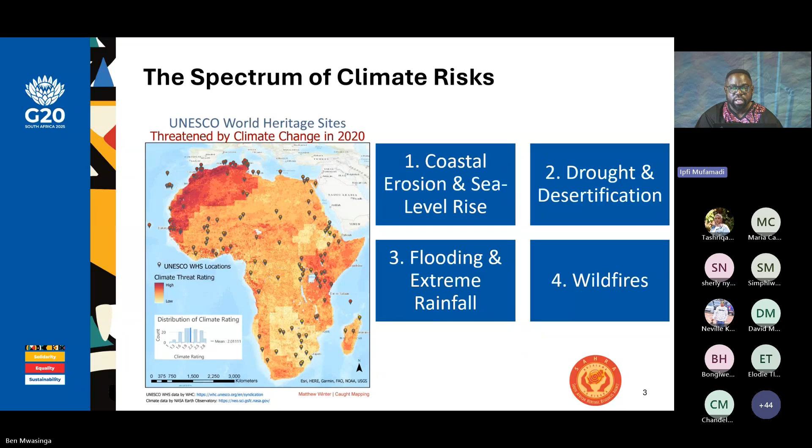The image on your left shows the mud brick buildings of the Djenne cultural landscape in Mali. This is also a UNESCO World Heritage Site. And through drought and desertification, there is further erosion of this cultural heritage site.

Another impact that it has in terms of the intangible cultural heritage is that due to the dryness of the soil, the populations living within this region are unable to replace or restore these structures, which is an annual practice. Again, we can see how something as simple as a drought or even drier conditions than usual can have a very destabilizing effect on the population, especially in Mali, where the site is located.

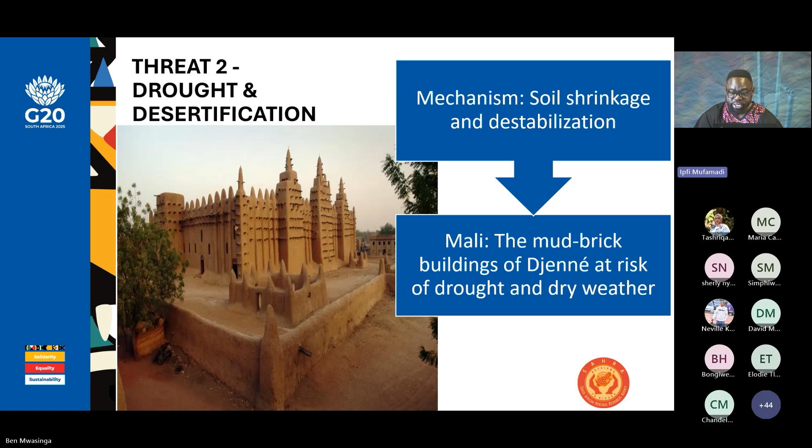And then this brings us closer to home. We had the devastating floods in 2022 in KwaZulu-Natal. There was a significant loss of human life. These events of flash floods and extreme weather conditions have been further exacerbated over the years due to changing climate.

So therefore, just as you can imagine, within South Africa, which has a massive coastline, and also a lot of shipwrecks and underwater cultural heritage, there is a severe risk to those heritage resources. One of the cases which will be explored today is the Tatham Art Gallery, which is in KZN.

And then we have wildfires, which have been a growing occurrence again within South Africa. A lot of us are aware of the fire that devastated the Jagger Reading Room at the University of Cape Town. As it has been established now, the very dry conditions, which were not normal, and the rising high temperatures within Cape Town played a significant role in the devastation that happened at the Jagger Reading Room. There was a significant loss of archives within this reading room.

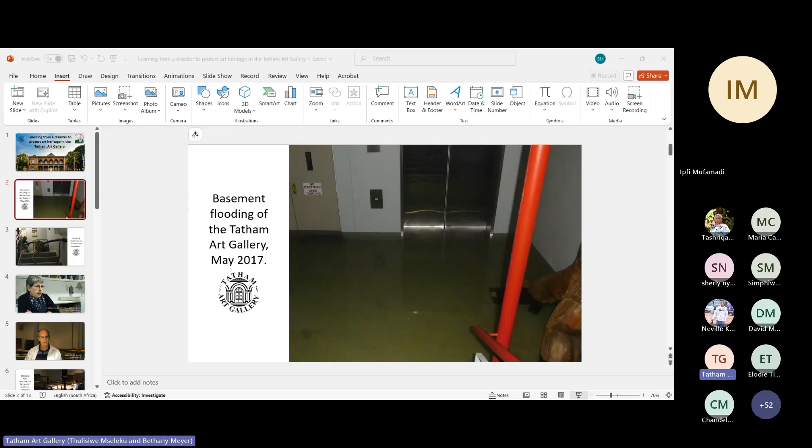As tragic as this incident was, it did highlight the need for the gallery to upgrade its current systems and create backups in case of power outages. This included adding new equipment and upgrading current infrastructure.

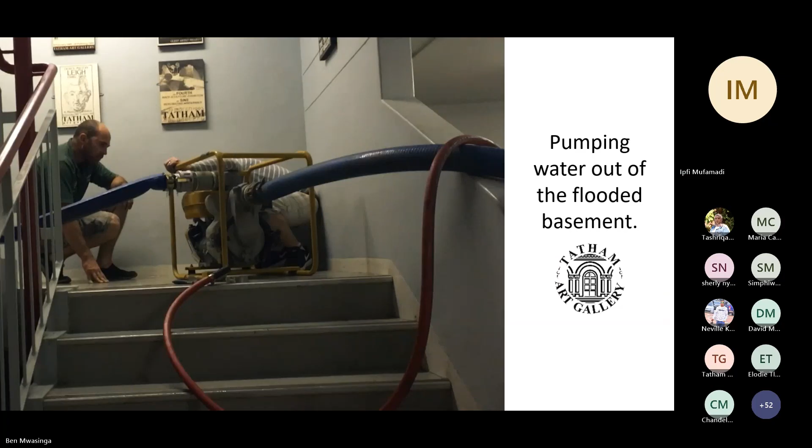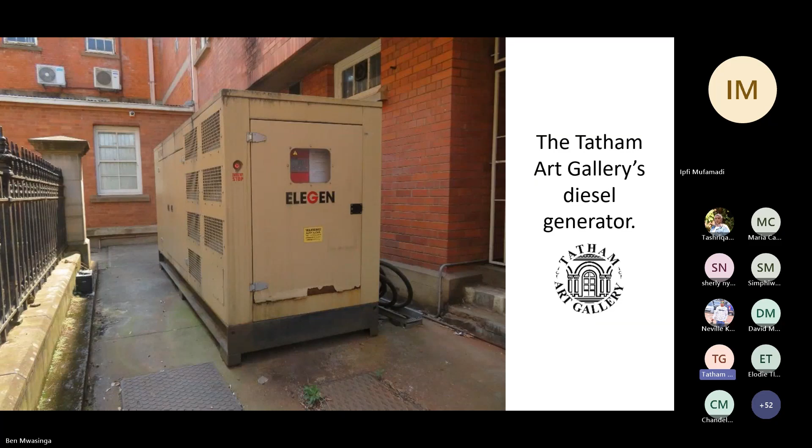The gallery started by commissioning a diesel generator as a power backup. The generator services the whole gallery as well as the water pump systems. This generator can potentially power the gallery for up to 24 hours. And additional preventative measures were the purchase of an independent petrol pump. Next slide, please. In case the backup generator either failed or the power went out for longer than 24 hours.

The gallery has also worked to include their aircon and pump service providers, Action Air, and their generator service provider, Doozy Electrical, in their action plans in case another flooding event occurs. This lets everyone know the correct responses and procedures during a similar event. This new equipment was an important part of the gallery's preventative plan. However, the storage area also needed improvement. Next slide, please.

To do this, the gallery expanded its basement storage area so that there is now an additional 80 meters of storage racks. And they converted a basement workroom into extra artwork storage and added a new fire suppression system. Next slide, please.

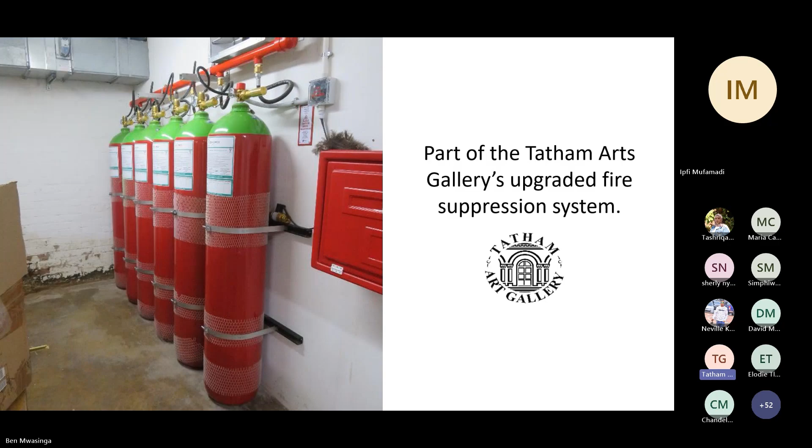The gallery storage policy has also been updated so that all the storage racks must be raised to 0.5 meters off floor level. Next slide, please. Next slide, please.

All the measures listed above were specifically implemented because of the 2017 flood. However, the gallery realizes it needs to continue to improve its infrastructure to preserve its collection, especially as climate change makes conditions more unpredictable. Climate change has disrupted water availability a lot, especially in the last couple of years. Water is integral to keeping the gallery's air conditioning systems running to keep the gallery at a consistent temperature, which helps in preserving the artworks.

To prevent water availability from disrupting the gallery's storage integrity, the gallery integrated water from the underground stream into the gallery's air conditioning system. Next slide, please.

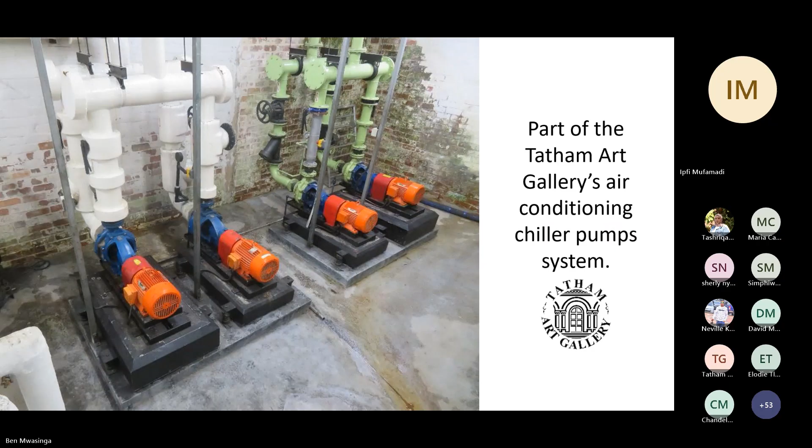However, the gallery does not only struggle with water shortages and how that affects preserving artistic heritage, but also, like the flood in 2017, excess water is another big struggle. The Tatham Art Gallery is a Victorian building that was completed in 1871 and is over 150 years old. Unfortunately, due to the complexity of its roof design, gallery staff have been fighting a losing battle with leaks for the last 20 years or so. This problem has been exacerbated in the last couple of years as heavy rain and windstorms have become more frequent. Next slide, please.

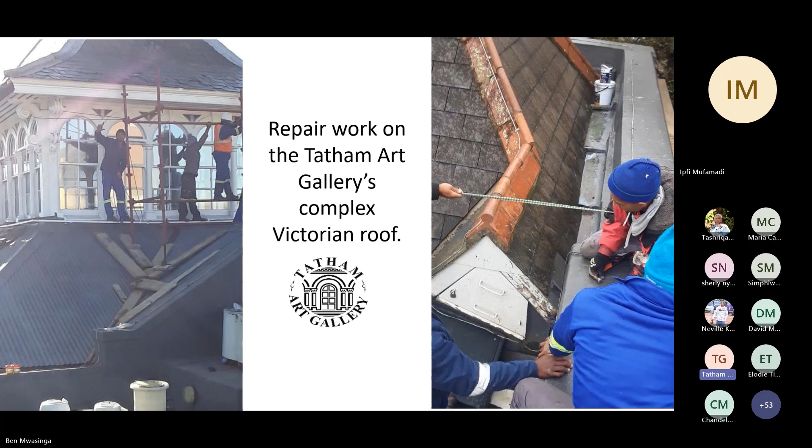The continuous leaks have affected the gallery in a number of ways. Structurally, the roof and other structural components need regular repairs in order to keep the gallery functional. Next slide, please. The water damage also affects the gallery's ability to host exhibitions. There are several display walls where the artworks have had to be permanently removed due to wall leaks. It has also affected some of the gallery's storage areas, which has required the gallery to create makeshift storerooms. This can make retrieving artworks difficult, and that can delay exhibitions.

Although the Tatham Art Gallery is committed to fully repairing the roof, several logistical aspects make it difficult. As a heritage building, the gallery needs to consult with AMAFA, the heritage statutory body in KwaZulu-Natal, before they make any changes, which makes it hard to do more than make small repairs. The tiles which would be needed to make repairs were imported and have been discontinued, so sourcing them is difficult. The gallery would also need to find an expert on restoration and repair of both heritage and Victorian buildings. Despite these difficulties, there is ongoing work to organize the full repair and restoration of the roof. However, it will be slow due to the logistical reasons listed above.

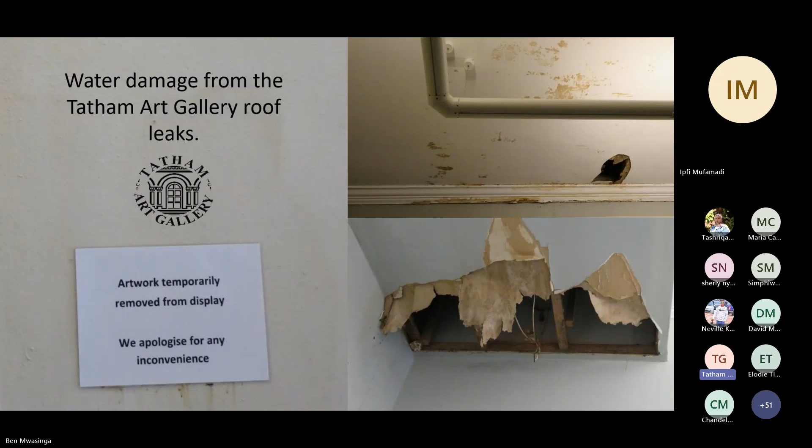Good morning, colleagues. My name is Tulisiwe Msaleko. I'm the manager at Tatham Art Gallery and Theatres. Let me just apologize that I think technology is letting me down here. My battery has just gone off and I'm trying to charge, it's not charging.

So if the building is over 60 years, it is registered as a heritage building. So you don't have to do any renovations or any alterations that you may like to do in the building without consulting them. They are constituted according to the KZN Heritage Act, and also the Cultural Institutions Act. So they are just a constitutional body that we need to follow. We need to comply with them whenever we are renovating. So in my experience, I've been at this gallery and we are having a challenge. I hope you heard my colleague trying to explain how old our building is.

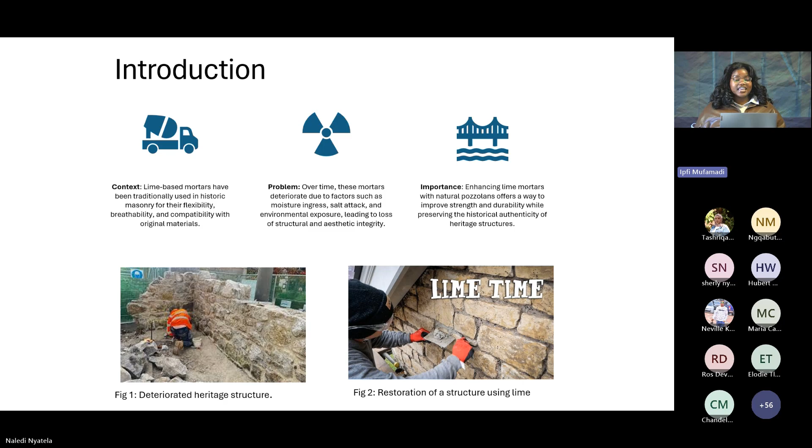What makes this exciting is that pozzolans are natural. They are widely available and low in carbon compared to cement. In fact, they can reduce the need for high energy materials, making conservation more environmentally friendly. It's a way of blending heritage wisdom with modern sustainability goals.

So the main research question driving this project is: how do pozzolans affect lime mortar properties? The aim is to identify formulations that provide better mechanical and durability performance while still aligning with the requirements of historic masonry restoration. To answer this, I've defined three main objectives: one, to investigate the effect of natural pozzolan on the workability properties of lime-based mortars; to investigate the effect of the natural pozzolan on the strength of these lime-based heritage mortars; and to investigate their effect on the durability properties of the lime-based heritage mortars.

I will be testing 3 natural pozzolans: bentonite, calcinated clay, and metakaolin. Each pozzolan will partially replace lime at 10%, 20%, and 30% by weight of the binder. These specific percentages are selected based on findings from past research, which shows that a 10% replacement often provides minor improvements with minimal changes to the mortar's traditional behavior.

And then 20% is considered a balanced point, where the strength and durability gains become more noticeable. And at 30%, it tests the upper limit of the pozzolan substitution, beyond which the mortar may start to behave like a hydraulic mix, compromising heritage compatibility. So testing across this range helps to identify the optimal performance and historical integrity.

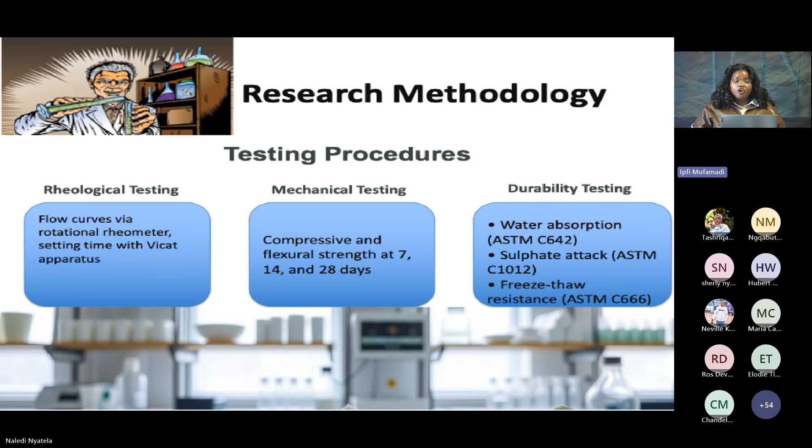And finally, durability testing, including water absorption, sulfate resistance, and freeze-thaw cycles. These tests will simulate moisture ingress, chemical attack, and thermal stress, giving us a well-rounded picture of the long-term performance of these natural pozzolans. So from these tests, I expect to identify a few practical mixes.

One, mixes that improve strength and resist moisture damage; mixes that keep the mortar breathable and flexible; and mixes that are easy to mix and that we can apply in real restoration projects. And lastly, mixes that use locally available or low-cost natural materials where possible. After I'm done, these mixes can be recommended to conservators, masons, and municipal heritage officers for trial repairs, with the aim of scaling successful recipes across similar sites.

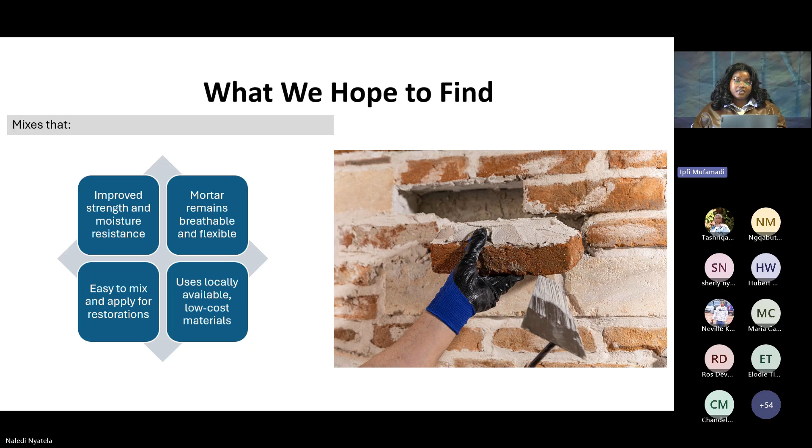So this work is not just academic, it has real local benefits, and I'm going to highlight a few. With this work, at the end of it, it can help heritage structures, because when you use these mixes, we might have stronger, longer lasting repairs, which means fewer interventions over time. That's going to save money while preserving authenticity.

It can also provide better resistance to salt and water, especially important for coastal areas and for buildings struggling with rising damp, like here in Cape Town, like Castle of Good Hope. And using natural materials that are locally available supports sustainability and keeps our suppliers involved and keeps traditional craft skills alive.

And finally, we can have clear practical guidance that empowers small heritage groups and local government to make informed decisions about their repairs.

So all of this is grounded in well-established conservation principles: compatibility, minimal intervention, and reversibility. In other words, we are not replacing traditional mortars with cement. Instead, we are fine-tuning them, making small, thoughtful additions that will strengthen performance while still respecting the original fabric of the building.

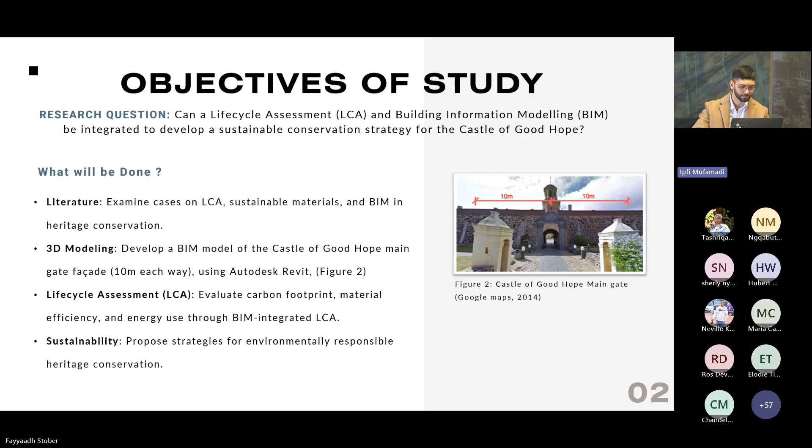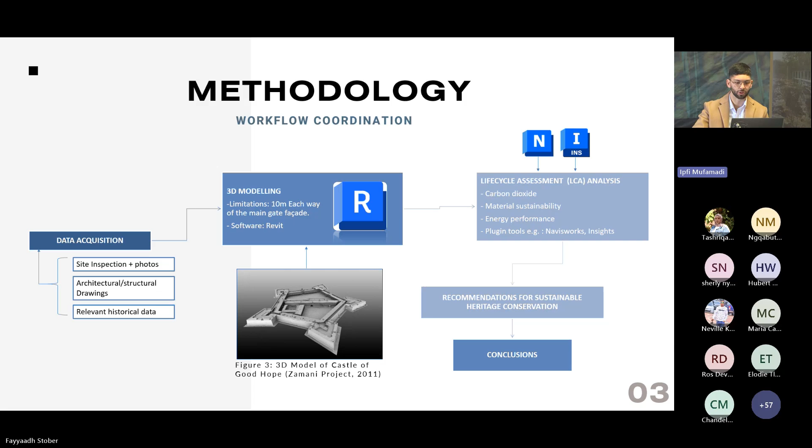Thirdly, we will move on to the life cycle assessment analysis. In conducting the life cycle assessment, we will focus on carbon dioxide emissions, material sustainability, and energy performance, utilizing Revit plugins such as Navisworks or Autodesk Insights. For the recommendations and conclusions, we will formulate recommendations for sustainable heritage conservation based on the life cycle assessment findings.

This step is crucial for green heritage as it ensures that any intervention is based on accurate real-world data rather than just assumptions. For the 3D modeling, we developed a detailed BIM model of the main gate facade using Revit. This digital representation allows us to apply material properties and simulate conservation strategies without physically altering the structure, thereby reducing waste and unnecessary interventions.

A bit of background, according to Robertson 1980, the walls were mainly constructed of dressed Malmesbury slate bonded with lime mortar and are about 5 meters wide at ground level and about 8 meters high. The red brick capping was about 2 meters high and was added in 1830 by the British garrison.

The third step of the current findings will be our sample analysis. We tested the life cycle assessment tool using a sample dataset to evaluate its efficiency and understand how outputs will be presented. While these results are preliminary, they provide a framework for assessing the carbon footprint, material sustainability, and energy performance of the Castle de Goede Hoop.

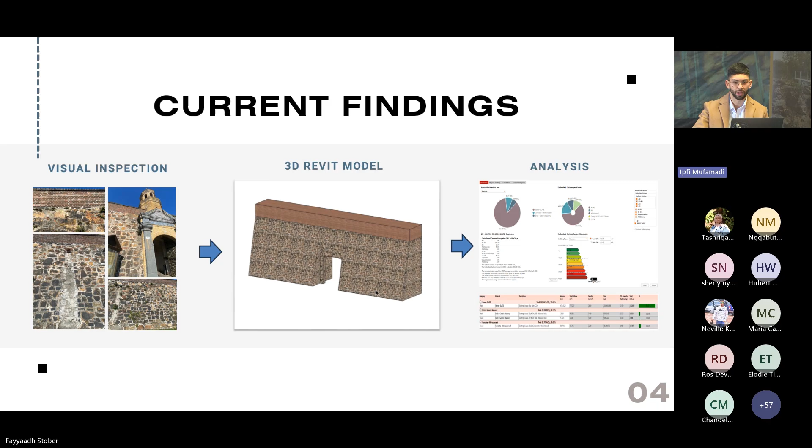For the expected outcomes, this research is expected to produce a detailed 3D model of the castle's main gate facade, the first of its kind in South Africa.

This project will also offer something new in the context of South Africa, which is a framework that merges digital heritage modeling and sustainability. It's a model that researchers, architects, engineers, and even environmental specialists can all use, making it replicable and meaningful. Ultimately, the study aims to contribute to sustainable heritage by conducting the first BIM-integrated lifecycle assessment of the Castle of Good Hope in its context.

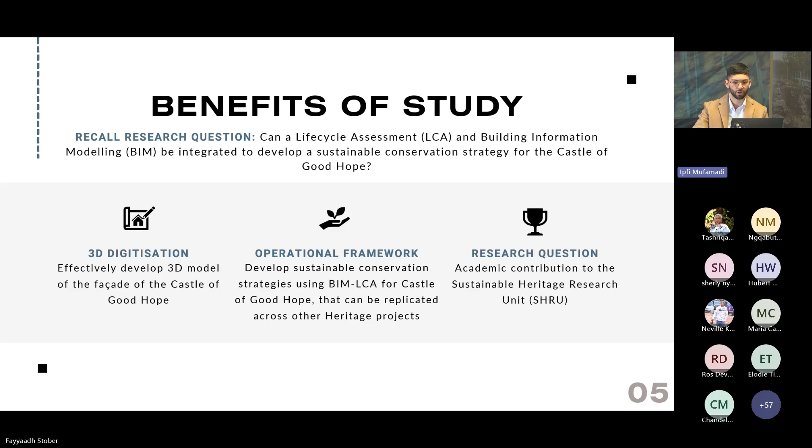To conclude, this research sets out to explore how integrating lifecycle assessment and BIM can support the sustainable conservation of heritage structures. Using the Castle of Good Hope as a case study, we're developing a replicable, data-driven framework to measure environmental impacts and guide future interventions, ensuring our heritage stands strong in a low-carbon and sustainable future. Through this advancement, this research doesn't just preserve history, it future-proofs it.

Furthermore, this year our Sustainable Heritage Research Unit is working on a whole host of research projects that align with the principles of green heritage, in order to preserve cultural heritage and ensure environmental sustainability. Together, these projects aim to promote sustainable heritage conservation practices, ensuring that our cultural assets are preserved in harmony with environmental goals.